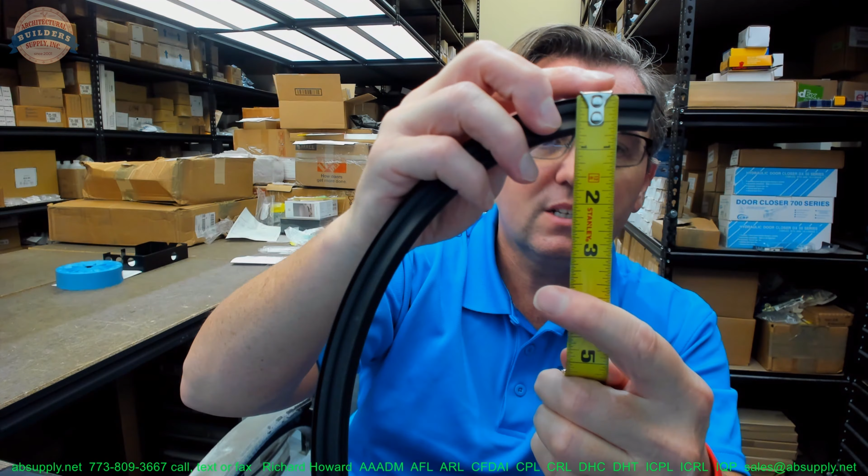The width of the backer, let's be a little more accurate with the dimensions. The width of the rigid plastic backer is 0.472 on that backer. The thickness of it, it's very thin. It's about 40 thousandths of an inch. The overall height, you can see, is about 5/8 of an inch. Okay.

A sponge type insert like this would be appropriate for sound attenuation, thermal attenuation as well. Not really great for true waterproofing because it's full of tiny little holes, and they would generally use a closed cell type product that's not sponge-like when complete water repelling is what they want to do. So in a sponge type environment, you're going to be better off with sound attenuation, thermal attenuation.

They say that this is for the 4301, 430, 350, 434 series of products. There's probably a perimeter gasket that would take this insert as well. We'll take a look. Before we switch to the screen view, this is available in lots of different lengths. This happens to be a 4-foot length that the client ordered. You can order any length that you want. It's obviously going to come in a roll. We have it listed in typical lengths, 24-inch through 96-inch and probably 6-inch increments or smaller increments.

You might say, well, I need 50 feet. Okay, great. Order 10 60-inch pieces and then indicate in the comment field, ship this as a continuous roll at 50 feet, because it's sold per foot. So let's switch to the screen view now and let's take a closer look at some supporting documentation.

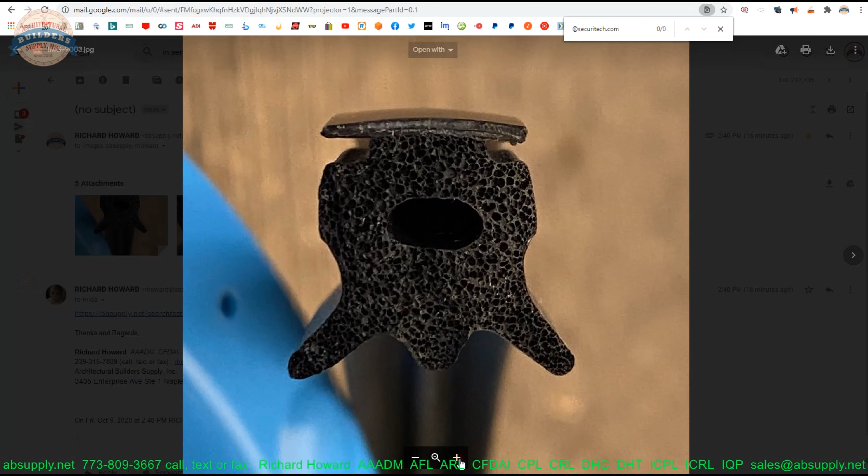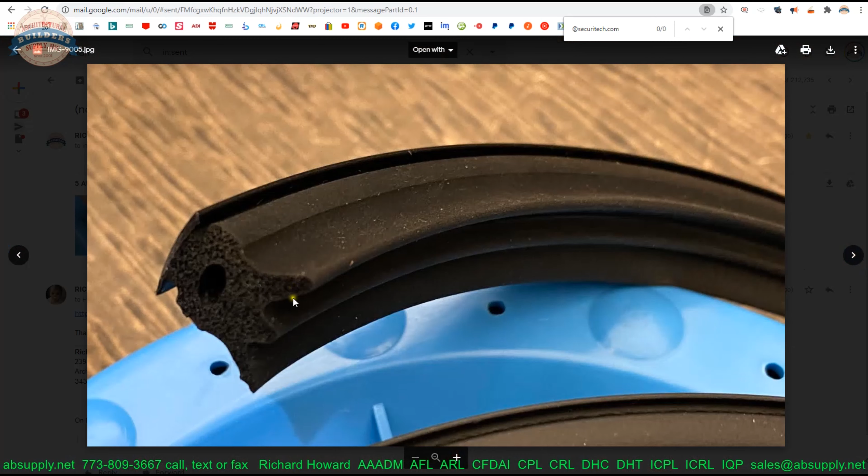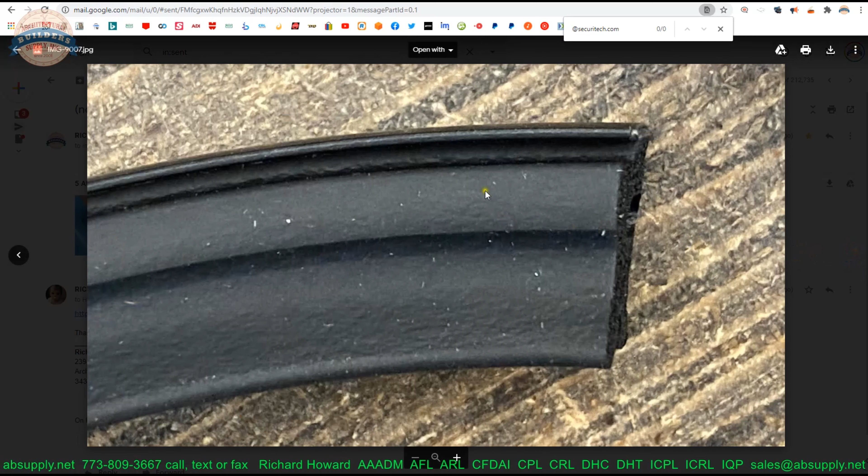Here is the item that we are looking at. We can take a look at some photographs that we have. Here's what it looks like in an end view. There you can see all those small little pockets. A lot of surface area would be created, of course. That's why it is shaped like this. The backside showing the rigid backer. And just what it looks like in the front of the unit here, or from an elevation perspective, I suppose. Now, there's a listing here of the products that it is used in.

So let's click on the link below this video to the manufacturer's page. When that comes up, we're going to be able to take a look at the manufacturer's page, and there is going to be a link to the catalog. So let's fire that up. We're going to take our part number. Let's copy that. Let's do a find function on our keyboard for E4304BL.

That doesn't come up. Let's get rid of the BL part. It still doesn't index. And it's starting to. E430. It's a large document, so it doesn't index very quickly. Let's throw that 4 in there and see what happens. 4304. Okay, I'm not seeing that come up.

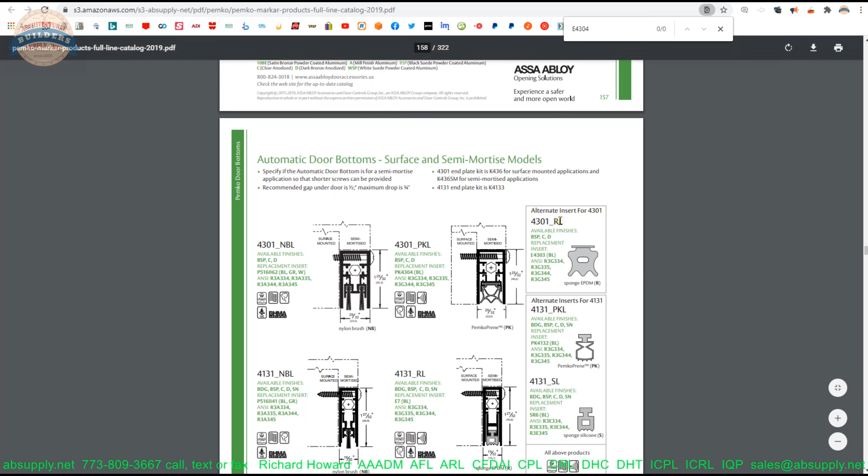Okay, and as I'm wondering why it's not showing up, I can only say that the E4304, I believe, is an old part number. I'm going to pull up a catalog that's 5 years old.

Well, the bottom line is somehow we got that 4304 part number, and the factory said that part number is no good, and what you need is an 03. So I said, yeah, I checked and made sure that it was compatible. So yes, as I was doing this, E4303 is the part number. Now that insert is going to be compatible with those different models that we listed before, 4301, 430, 350, 434.

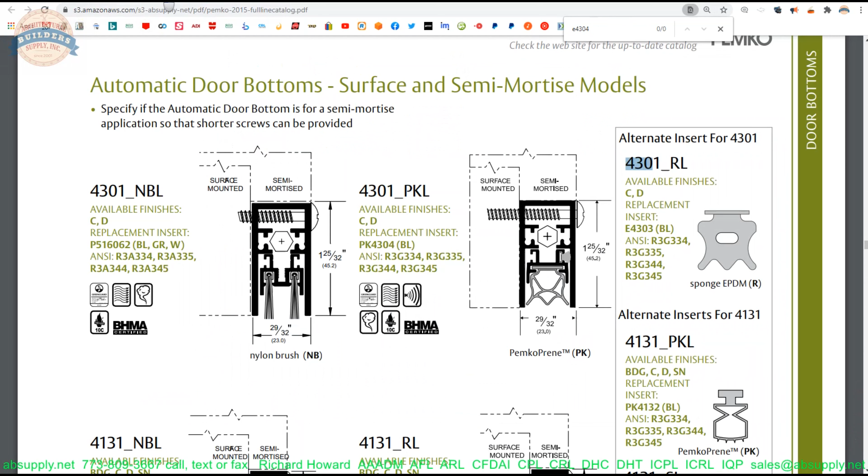So we can just do a search, and you'll see there's your 434 compatibility right here. There's your 430 compatibility right here, and so on. Okay. And there's that big gasketing that I assumed was available as well, perimeter gasketing.

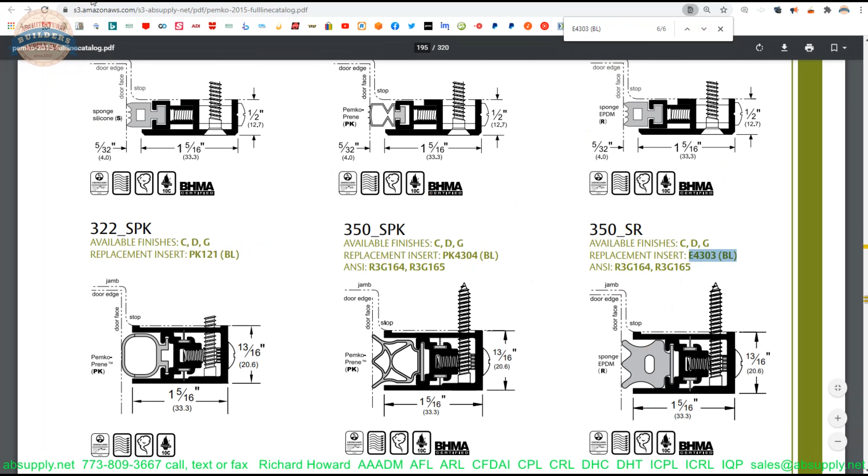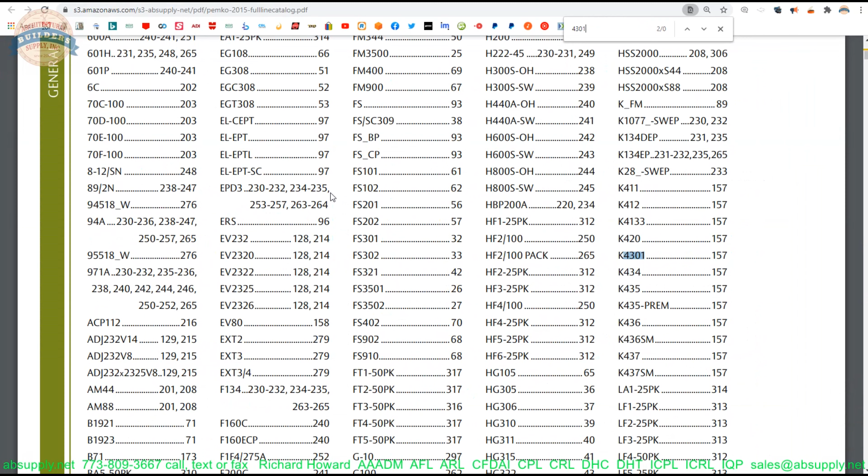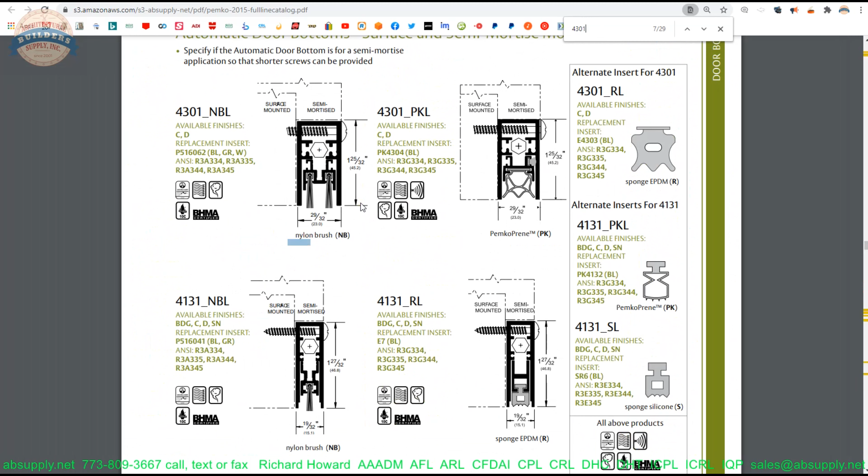So what I've done here to find my replacement in your 350 is I've opened up the manufacturer's page in our site. I have fired up the current catalog. What you could do is, let's say you had a 4301, just do a find function on your keyboard for 4301 and allow the document to index until you get to it. Find your 4301, and then you'll discover what the replacement insert part number is.

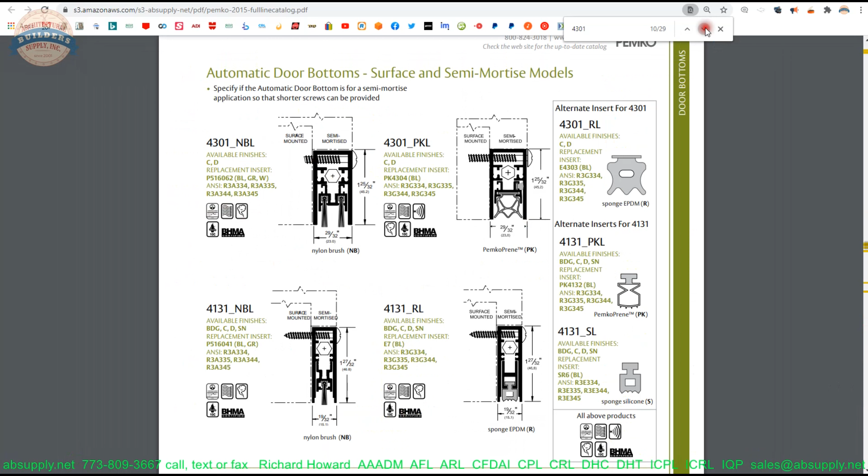The BL is in parentheses because in many items they can do it in different colors. This part number would just be E4303BL is what it would be. This is how you back into, if you know what model you have, how you would then determine what replacement insert that you need. So there you go.

You know, very often clients call and say, I bought this 10 years ago. I have no idea whose weather stripping I bought. And yeah, that's a problem in the sense that we don't know if this would fit, which is the point of providing the dimensional properties early on along with the visual review, because that's at times the only thing that we have going for us when it comes to determining whether or not something's going to prove to be compatible.

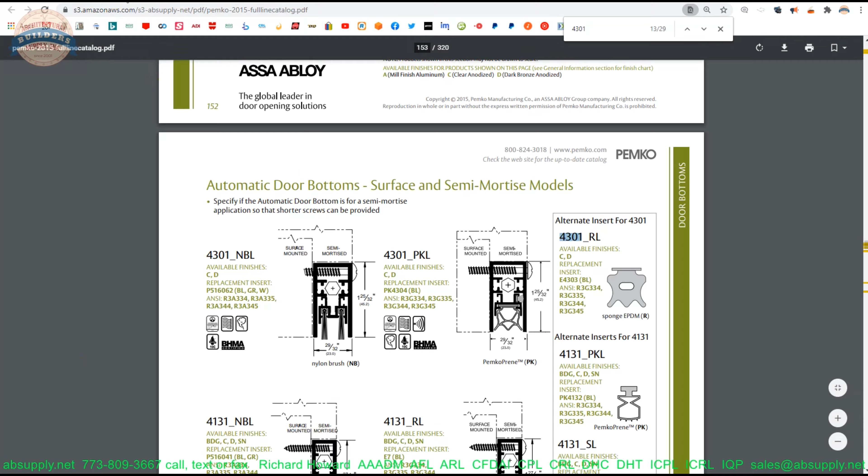Okay. Now that link to the manufacturer's page has that full line catalog, prior versions of the catalog as well. I like to keep older material because it allows us to do historical research. There's also a link to the A117.1, and that's the ADA guide for usable buildings and facilities. Why would this be on the Pemko page?

Well, this document governs all things as it pertains to access in the public sphere for the handicapped, the quantity of parking spots, the rise over run dimension of a ramp, the positioning of grab bars. Well, when it comes to Pemko, they sell thresholds, they sell ramps, they sell material that's very much governed by the requirement of it being handicap compliant. So that's why that document is there. Well, let's wrap up this video on camera.

Okay, again, the purpose of this video is just to help you determine whether or not this is compatible with your system. You know, sometimes when people order gasketing and they know that there's going to be a substantial amount of use over the opening, it's not necessarily a bad idea to order some replacement gasketing initially so that you have it when the time comes. You know, certain material doesn't drag very well. Door sweeps, because of the friction, may not necessarily be something that can be long-lasting. Well, it's unusual for someone to do that, and I don't know that I would, because by the time I need it, I'd forget where I put it. But the fact of the matter is, here it is.